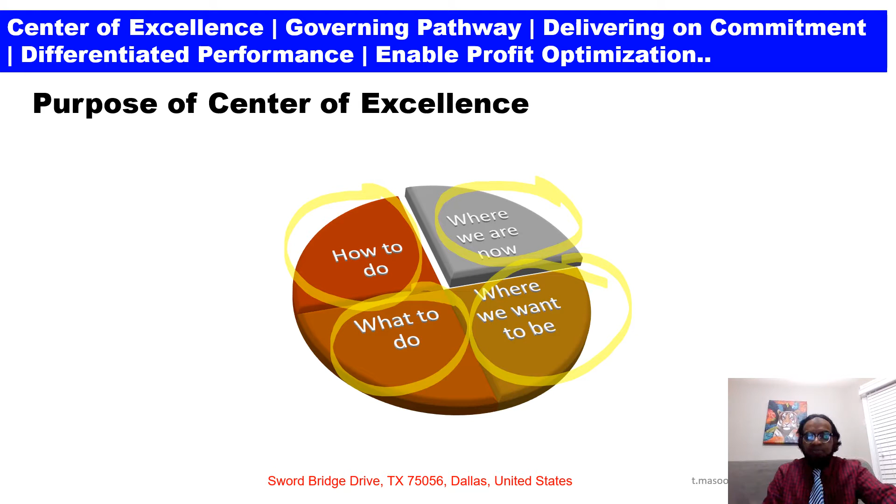Center of Excellence: governing path, delivering on commitment, differentiated performance, enabling profit optimization process. What is basically the theme or background of Center of Excellence? First, doing things right. Second, doing the right things. And doing the right things right.

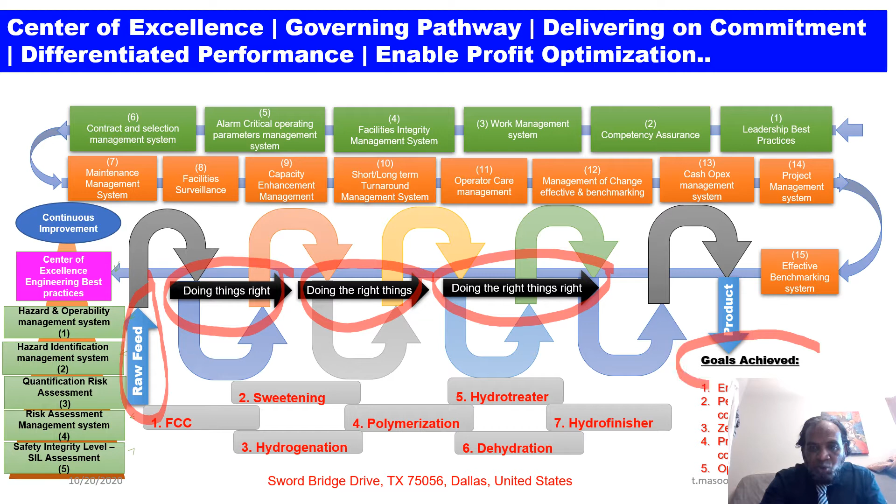This is my raw feed. It will pass through the process stream, and this is my ultimate goal achieved. In order to deliver the results, what I have to set up is the complete framework.

First are leadership best practices, competency assurance, work management system, facility integrity management, alarm critical parameters management systems, contract selections management, maintenance management systems, facility surveillance, capacity enhancement, short and long-term turnaround, operator care, management of change, effective benchmarks, cash opex management system, project management systems, effective benchmark systems, and what I have to deliver here is the Center of Excellence engineering best practices for continuous improvement.

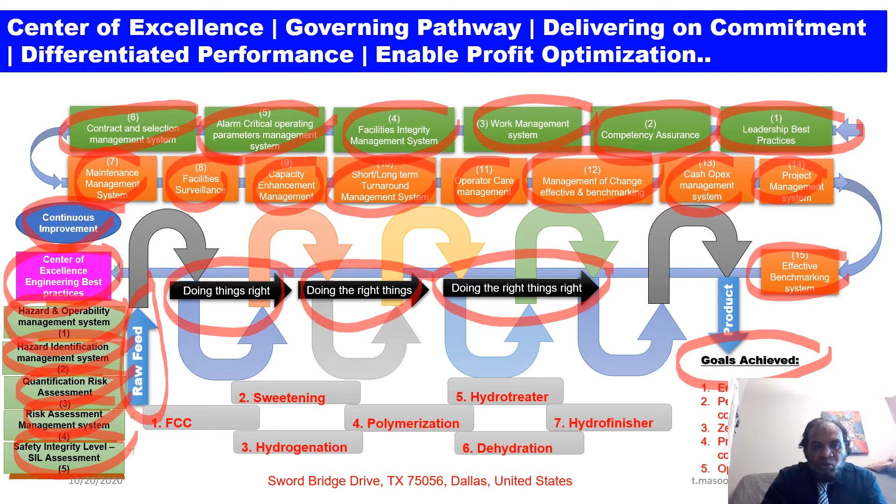So today we are going to discuss HAZOP, hazard and operability study. Next, we will provide you hazard identification guidelines, quantification of risk assessment guidelines, risk assessment and safety integrity levels guidelines. One by one, we will discuss the whole topics in order to deliver the required results.

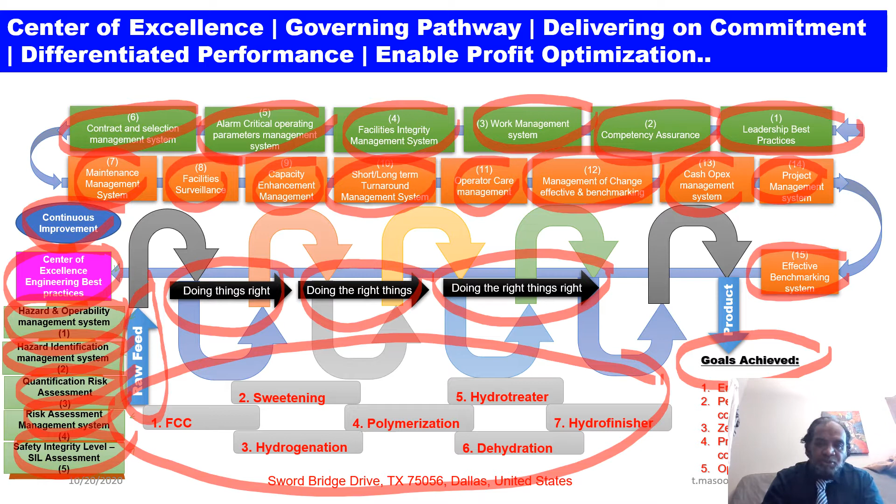What is the ultimate goal here? If you can see here, my FCC, sweetening, hydrotreating, polymerization, hydrogenation, dehydration, hydrofinisher. This is all the process equipment and process units, upstream, midstream, and downstream facilities.

Performance parameter. It demonstrates first the personal safety, co-workers, contractor, and community safety. What we should do is the system should be reliable enough to deliver required results. That is my leading factor, and this is my semi-leading factor.

Environment compliance, process and asset safety, work safety or not at all — this is my semi-lagging factor. Production rate at plan, product on specification. There is always a time to do the right things at the right time. And last, continuous improvement: if it is worth doing, do it in a better way.

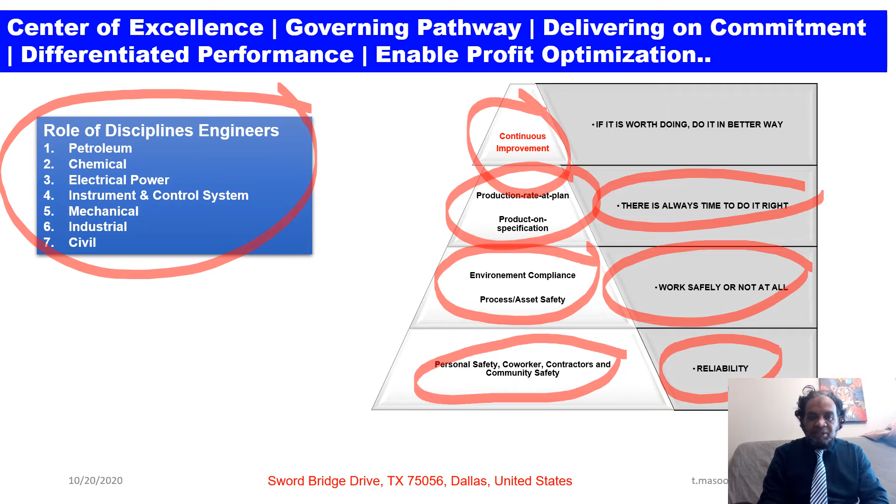In order to deliver the result, what must the people do? On my left side, this is the role and discipline engineers: petroleum, chemical, electrical power, instrument and control, mechanical, industrial, and civil engineers. Everybody has to contribute to deliver their specialization: loss prevention engineers, safety engineers, process engineers, operation engineers, optimization, all discipline maintenance engineers, corrosion engineering, integrity, reliability, cost, budgeting, and project engineer.

If these people deliver the results, we will be in an excellent position to achieve what we have planned: personal safety, environment compliance, production at rate, and continuous improvement — the last slide of this performance parameter.

What we need to do to deliver the result — we need a Center of Excellence for engineering best practices.

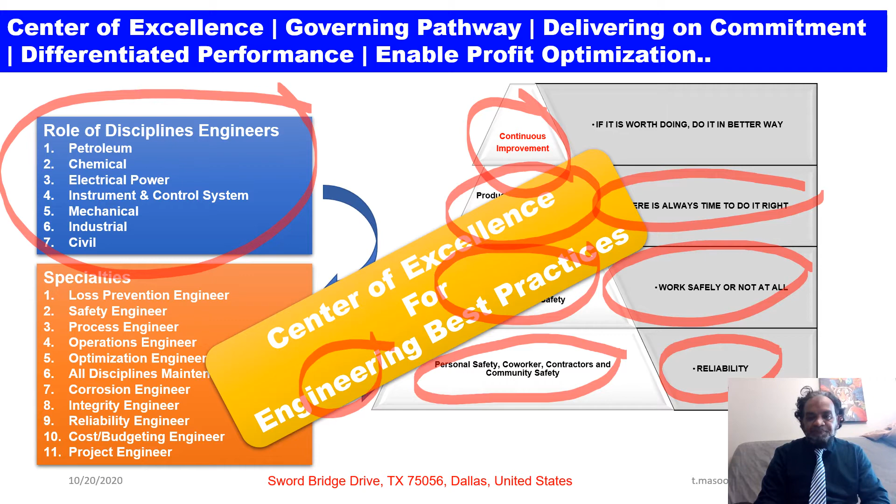Forward message: this document has been developed for a corporate HSE quality management system to determine and provide a minimum requirement for hazards and operability study, that is HAZOP.

Number two, this document is published for oil and gas companies, operation departments, contractors, and consultant utilization. This document in its present form reflects, as far as possible, current corporate requirements, taking into account the known available industry best practices and applicable latest national and international codes and standards.

Number three, this document is subjected to periodic review to reaffirm its adequacy or to conform to any changes in the corporate requirements, or to include new developments in its subject matter.

Number four, this recognizes that there will be cases where addenda, data sheets, or other clarifications need to be attached to the HSE publications to suit a specific application or service environment. As such, the contents of the document shall not be changed or re-edited by any user, company, contractor, supplier, agent, etc.

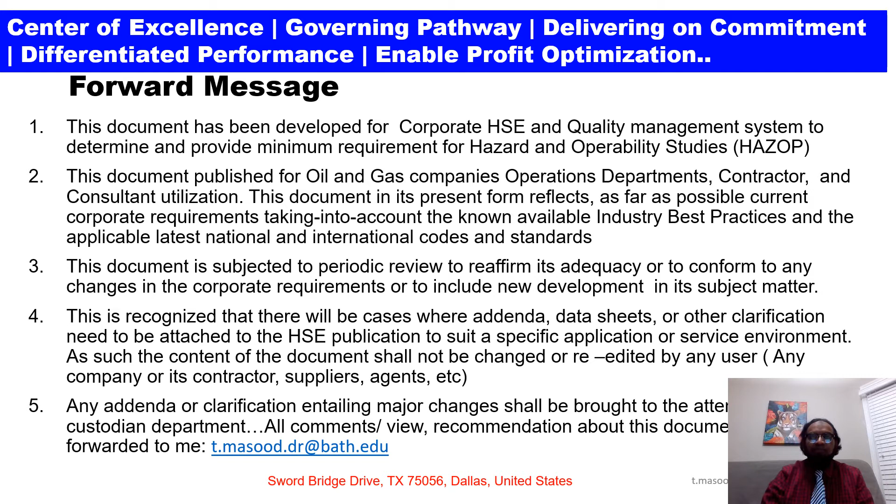First, HAZOP is required for any changes to the process. Hazard and operability studies are a form of hazard identification. The study identifies possible deviations. Contractor shall conduct HAZOP study in compliance with the requirements in the selected company's operational guidelines.

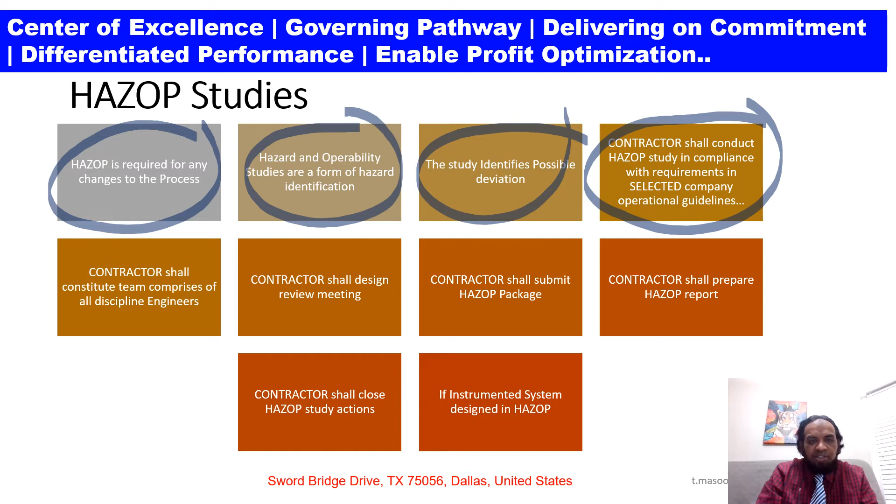Next, contractor shall constitute a team comprised of all discipline engineers. Contractor shall design a review meeting. Contractor shall submit the HAZOP package.

Contractor shall prepare HAZOP reports. And number 9, contractor shall close HAZOP study action points, and if instrumented system design is in HAZOP. Now, further detail we will discuss on my next slide.

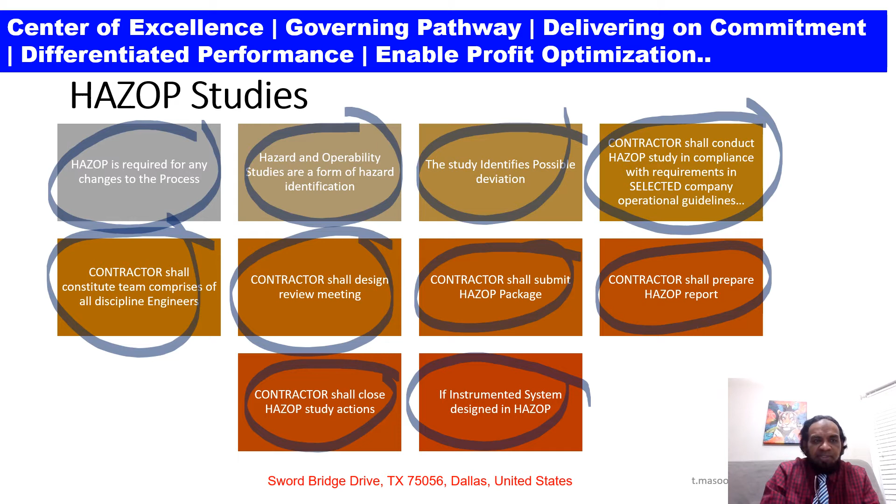HAZOP objective: the primary aim of HAZOP study is to provide a systematic method of analyzing the causes and effects of abnormal plant operation. The technique for hazard and operability study, HAZOP, has been developed to provide a systematic method of analyzing the causes and effects of abnormal plant operation.

So what we have explained here are the study methods and recording requirements for HAZOP studies. Its purpose is to advise the HAZOP team members and other project members of the approach to be adopted, as well as the other contribution requirements from individuals.

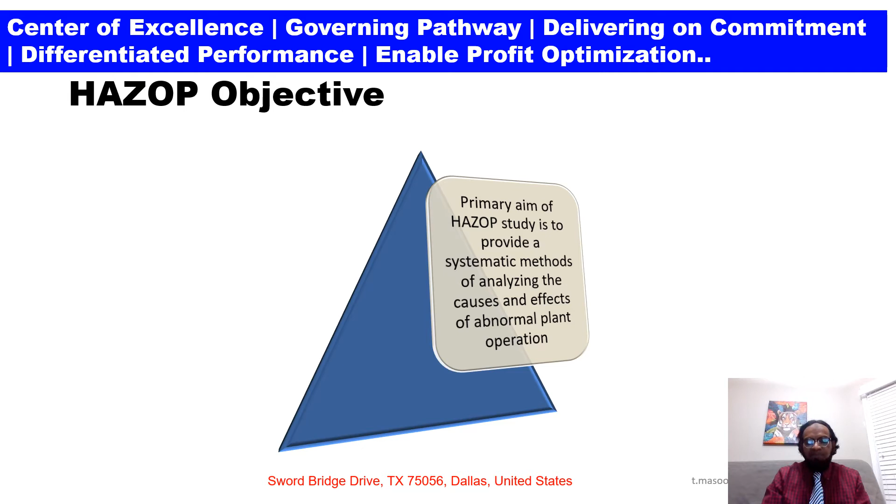It is based upon considered worldwide best practices and international benchmarks in HAZOP deployment and management systems. That is what the HAZOP objective demonstrates.

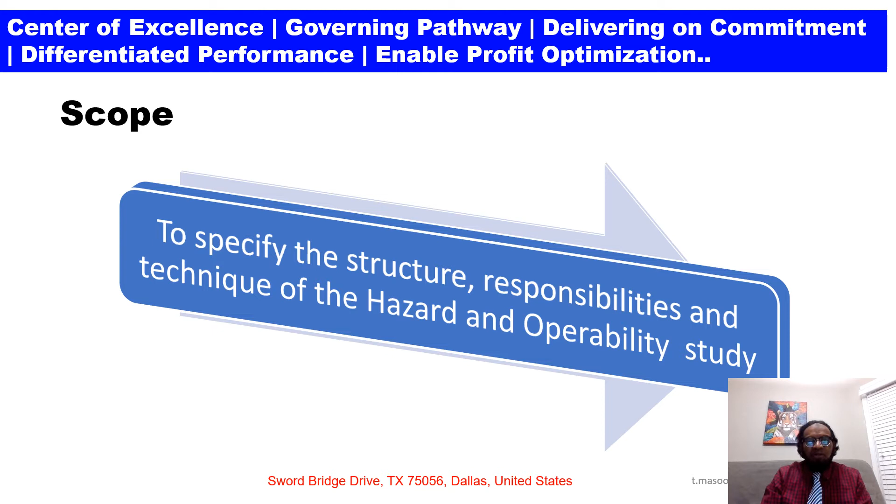Scope: the standard specifies the structure, responsibility, and technique of the hazard and operability study. Now the applications: HAZOP study applications are applicable to plant, process, and power utility systems.

The standard is applicable to plant or process utility systems. Coverage shall include all lines containing hydrocarbons or fluids which could pose hazards, and utilities, for example flare, open and closed drainage systems, fire fighting systems, and emergency systems, cause and effect logic, etc.

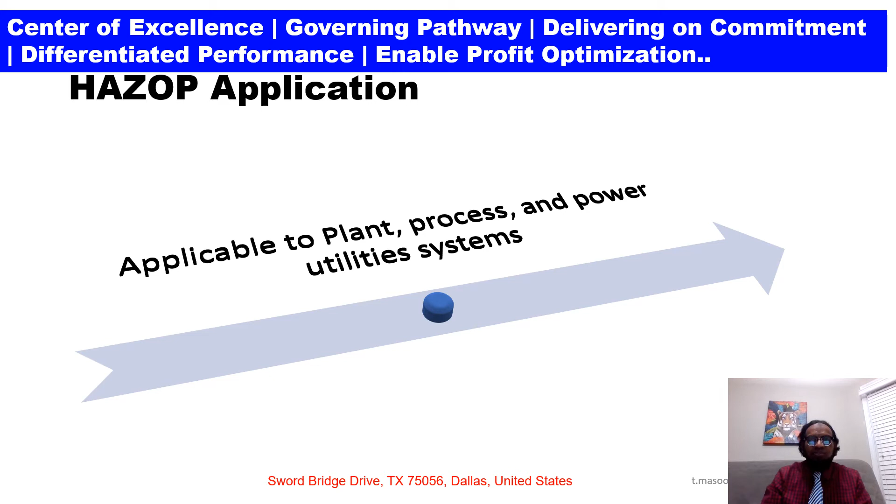Structure and responsibilities. First is the team structure, then all projects, in-house feed projects, plant change requests, HAZOP training courses in line with corporate standard requirements. That's basically what it demonstrates.

All capital projects shall be led by an independent third-party chairperson, assisted by an independent scribe. In-house feed projects and PCRs may be chaired by an independent but non-third-party chairperson. All HAZOP team members should be required to undertake or recognize HAZOP training courses in line with corporate requirements.

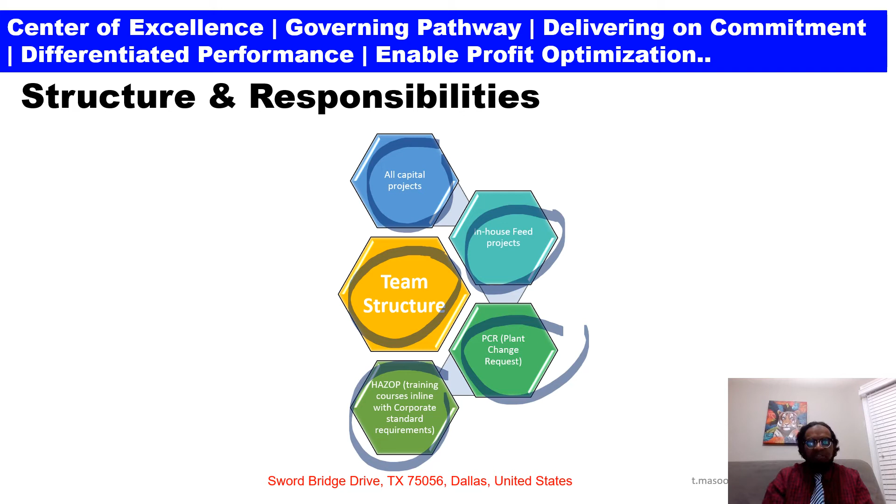HAZOP team members shall be categorized into two forms: core members and non-core members. So from the next slide, we will discuss what the HAZOP core team shall consist of.

HAZOP core team shall consist of: first, a project engineer; second, operation representatives, process engineers, instrument engineers, and technical safety and loss prevention engineers. So: project engineer, operation engineer, process engineer, instrument engineer, and last, the technical safety and loss prevention engineer.

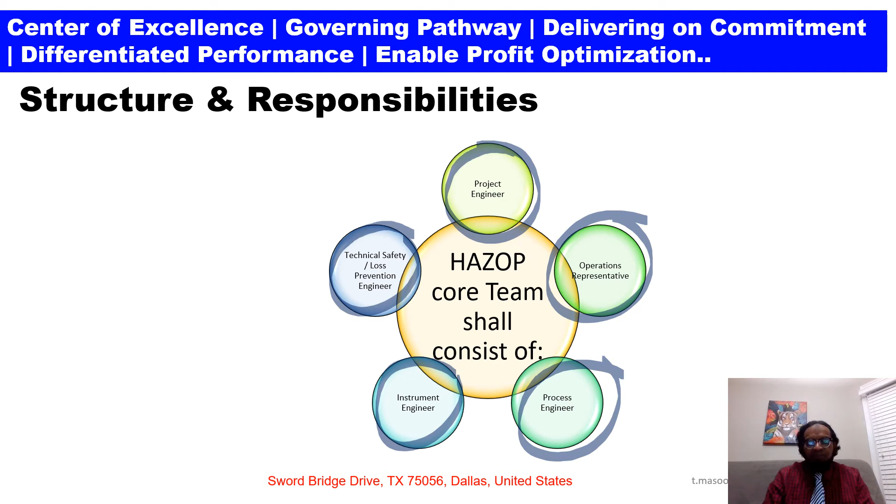Corporate HSE requirement: the corporate HSE department representative's main role is to assure that minimum company requirements with respect to HAZOP are being implemented. Attendance of a corporate HSE department representative shall be at the discretion of the corporate HSE manager. However, the project shall extend the invitation as required.

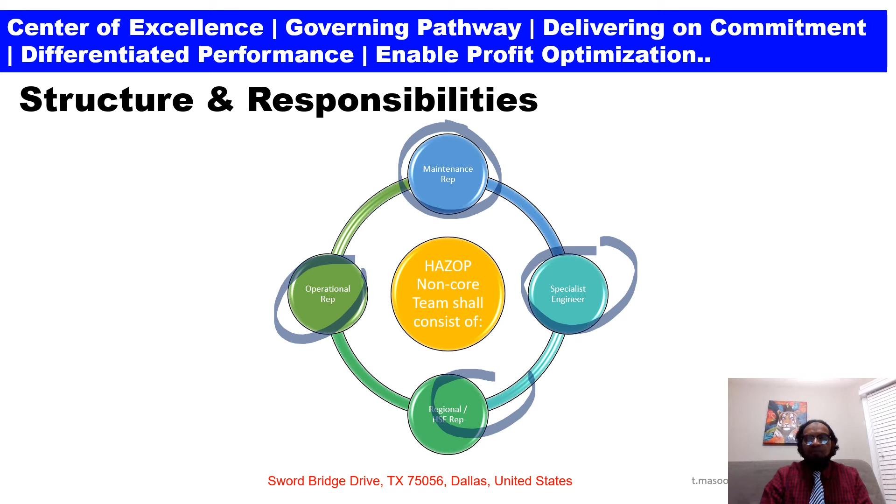So the non-core team shall consist of, first, a maintenance representative; second, a specialist engineering representative, regional HSE rep, and operation rep. So these four members are the non-core team.

Core team shall incorporate: when the HAZOP study is on a contracted engineering project, the core team shall incorporate additional representation from the contractor. Number 1, a process engineer, technical safety, loss prevention, and instrument engineers.

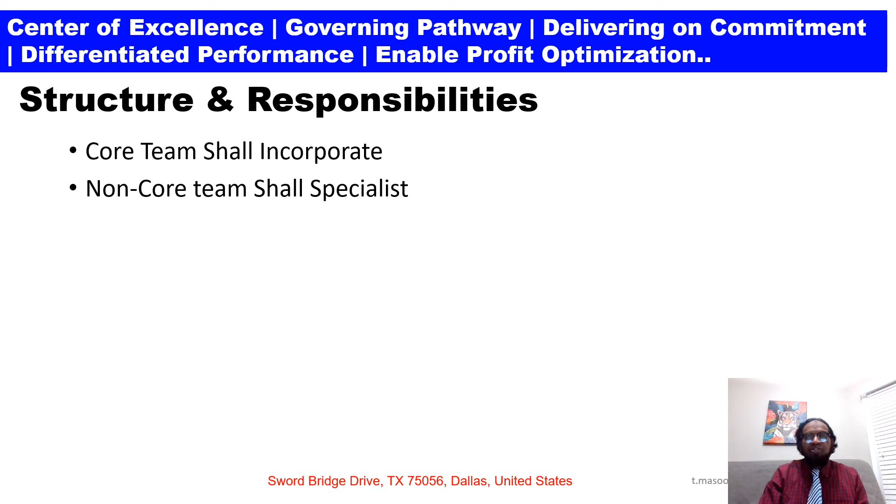Number 2, non-core team shall specialist: the non-core team shall consist of other specialist engineers, vendors, as and when required by HAZOP. It is essential that the team composition be appropriate for the plant or design being studied. All persons attending a HAZOP study must be available for its full duration without substitutions.

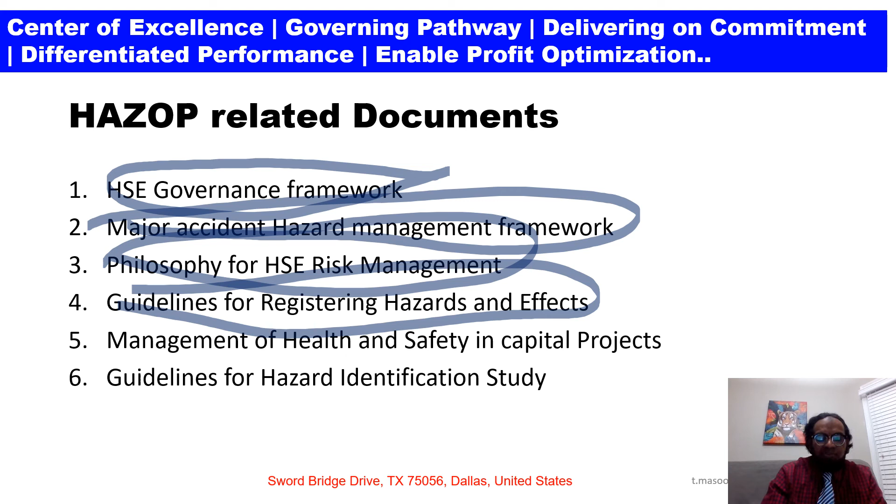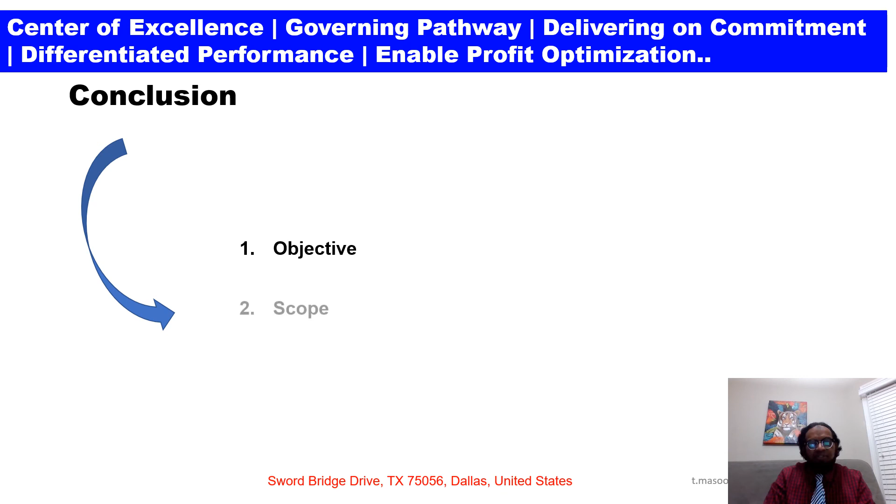Conclusion: we have discussed today the objective, scope, application, HAZOP core team and non-core team, and their roles and responsibilities.

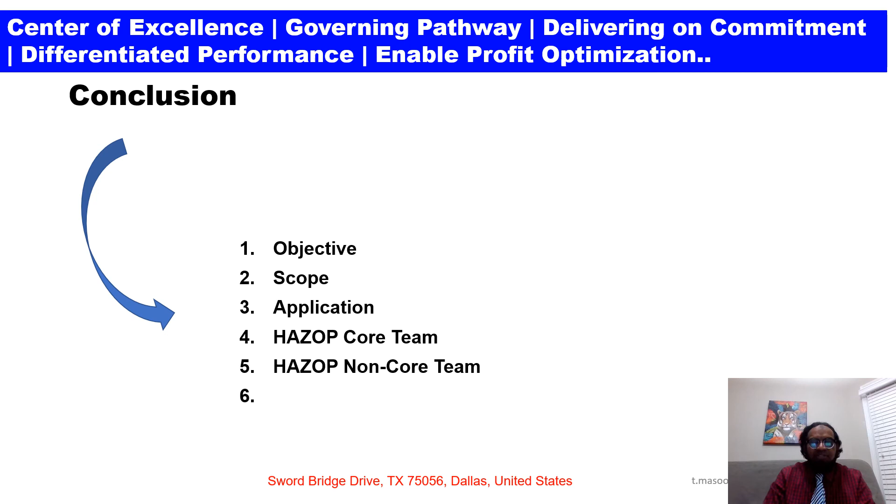Okay, my next lecture we're going to discuss experience required for HAZOP team members' roles, and HAZOP chairperson requirements.

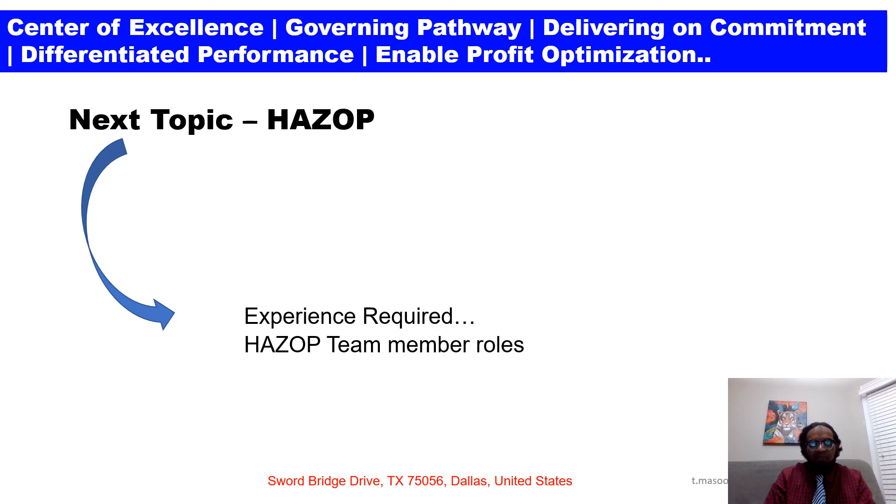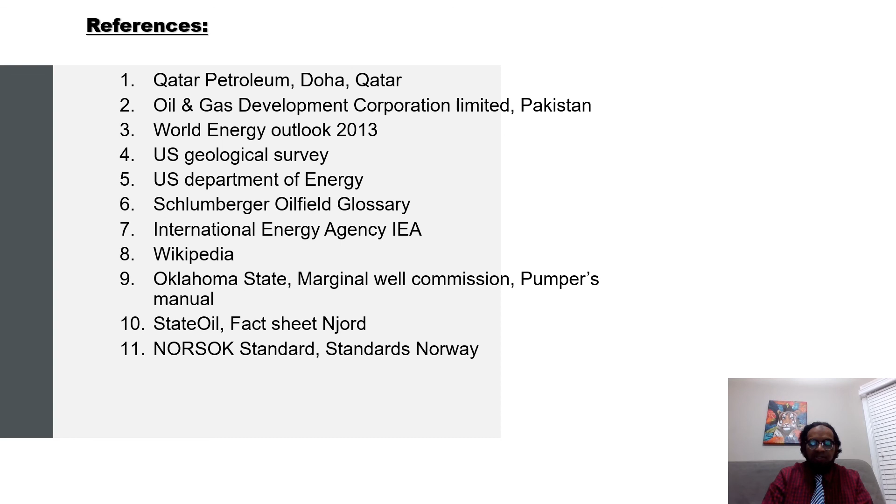Okay, a few references here for today's lecture: first, Qatar Petroleum Doha Qatar, Oil and Gas Development Corporation Limited Pakistan, World Energy Outlook 2013, US Geological Survey, US Department of Energy, Schlumberger Oilfield Glossary, International Energy Agency, Wikipedia, Oklahoma State Marginal Well Commission Pumpers Manual, State Oil Fact Sheets, NORSOK Standard Norway, Story of Oil in Pennsylvania, Air Liquide Gas Encyclopedia, Natural Gas from Wellhead to Burner Tip.